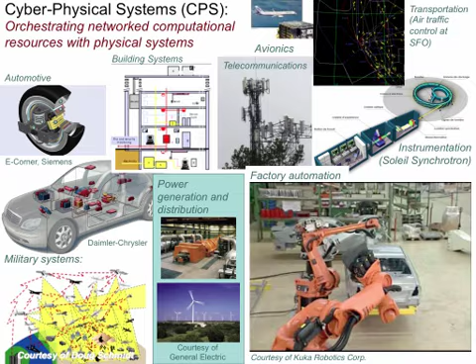Actually, it was Donatella's suggestion initially, I think, that I address this question about cyber-physical systems, and specifically the question whether this really is a new intellectual challenge. And I'd like to convince you today that it is, that it's a very interesting intellectual challenge, and that it does have some fundamental twists over many of the things that we've done before. So first, to make sure that we're on the same page, I want to make sure that everyone understands what I mean by cyber-physical systems.

The term itself was actually coined by Helen Gill at the National Science Foundation around 2006, and she helped pull together a community of interest from among academics that she saw as people who would be able to contribute in significant ways to the agenda, and then formed a new program in the National Science Foundation. And of course, many people were very suspicious, rightly so, of any new program. Is it just a rebranding of things that were there to begin with? What I'd like to do today is try to convince you that it is not just a rebranding, that it is actually a very interesting and very fundamental challenge.

So first of all, the field is about the orchestration of networked computational resources with physical systems. You could say this means it's about systems that include computers, so therefore it's embedded systems. But in embedded systems, people are really focused on the computing part. The interesting thing about cyber-physical systems is the conjunction of the computing part and the physical dynamics. That's where it becomes particularly pertinent, and where it really is a significant twist on what's been there before.

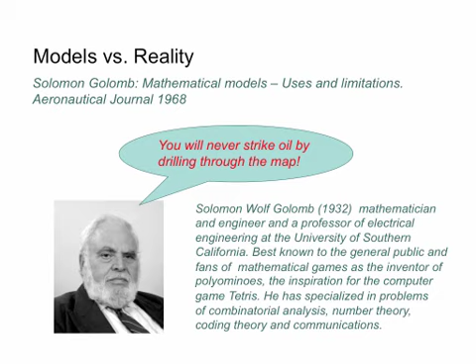And that, I think, is a very important observation. It says that you have to know very clearly in your head whether you are dealing with a model, i.e. a map, versus a geographic formation, which is the physical system. The distinction is very important, and I think engineers often get so close to their models that they lose sight of the distinction between the model and the physical system being modeled. While it's certainly true that you're not going to strike oil by drilling through the map, this does not in any way diminish the value of a map.

This should not be viewed as an indictment of models. The models are still exceedingly useful, but you have to understand where their utility stops, okay?

So I'd like to cite one other person, Hermann Kopetz, who actually taught me something over breakfast at a conference where I happened to run into him. And I've never actually found a very clear articulation of this concept in his papers, although it's there kind of indirectly. But he stated it extremely clearly at this breakfast, and it completely changed my way of thinking about a lot of the things that I was doing.

And what he said was that many of the predictive properties that we assert about systems, so these are things like determinism, timeliness, reliability, and safety, are actually not properties of systems. Systems don't have properties like determinism, okay? These are properties of the models of the systems, not of the systems themselves. The real strength of the models is that we can make definitive statements about the models, and from those definitive statements, we can infer properties of the system realizations.

So when we assert that a system is deterministic, that's actually not a legitimate statement about any physical system. No physical system is deterministic. How's it going to behave while it's being crushed? How's it going to behave when it's at the bottom of the sea? You don't know. It's not deterministic, but the model is.

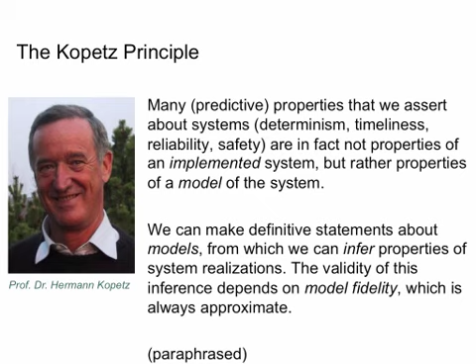Now, we have gotten enormous power from deterministic models. And I'm going to apologize right up front to those of you in the room who work on asynchronous logic and on probabilistic circuits that may or may not give you the right result. I sympathize with your challenge because you've got an enormous uphill battle to fight, which is to deliver the value that people in the circuits world have gotten out of deterministic models of circuits, okay?

So synchronous digital logic, that concept is a model. It's a model that is talking about rather messy behaviors of transistors and so on, but it's an extremely powerful model. And I would say that a huge part of the information technology revolution actually depends on this model. The fact that you can produce a microprocessor that will execute a particular chunk of code essentially perfectly reliably, over and over again, 1 billion times a second, and work correctly for years.

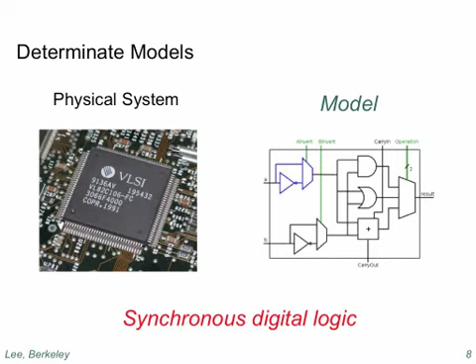The predictability and the determinism of that model is a very, very powerful thing, and it's not something that we should give up lightly. You could say, well, no physical system is deterministic, so we should give up determinism. And you're throwing out the baby with the bathwater. It's true, no physical system is deterministic, but you don't give up models that have this power easily and lightly.

Another example of a deterministic model that has had a huge impact in the development of our technology is single-threaded imperative programs. These are models of a process, of an algorithm. And they get executed, in fact, on the same hardware that is ultimately built on this synchronous digital logic, but it's quite a different model.

Anyone who has written multi-threaded programs knows the price that you pay when you lose this determinism, right? It hurts, believe me, it really hurts. It costs a lot to lose determinism in this case. And an awful lot of what we depend on in software is, in fact, the determinism that arises from being able to be assured of correct execution of a deterministic single-threaded imperative program.

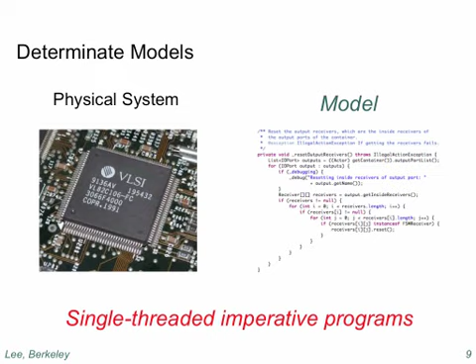What about the physical world? Well, in the physical world, we have also, for hundreds of years now, derived enormous benefit from deterministic models. You've got some physical system, this is a generator that will produce electric power. We have models that have been developed and refined over hundreds of years, differential equation models that are fundamentally deterministic.

I'm not saying that we don't have also non-deterministic models and even probabilistic models. Those are okay. What I'm emphasizing here is the power that we've gotten from the deterministic models, that they've given us an ability to design control systems, for example. I mean, you could say, all right, the feedback control system that keeps a helicopter in the air, how is that designed?

It's designed using deterministic differential equation models. Is the helicopter deterministic? No, of course not. But we wouldn't be able to design that control system if we didn't have that powerful engineering abstraction, okay? So we don't want to lose sight of the power of the engineering abstraction.

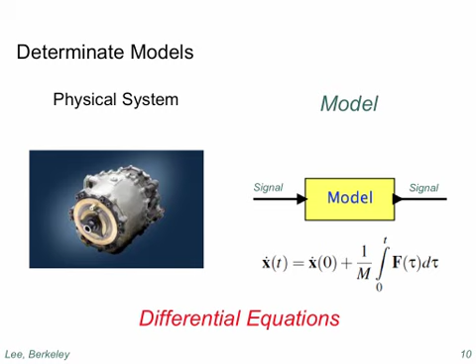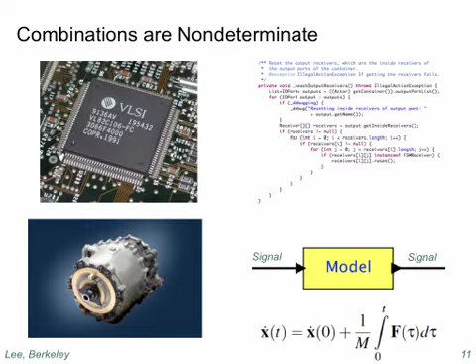Okay, so we've got powerful models for software. We've got powerful models for hardware. We've got powerful models for physical systems. What happens when we put them together? Today, they become non-deterministic across the board immediately. Non-deterministic, okay? We don't have deterministic models for the composition of that single-threaded imperative program and that generator. They're not there, okay?

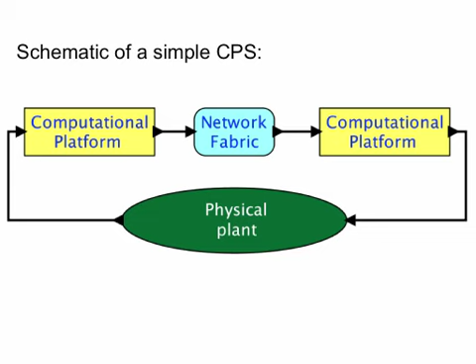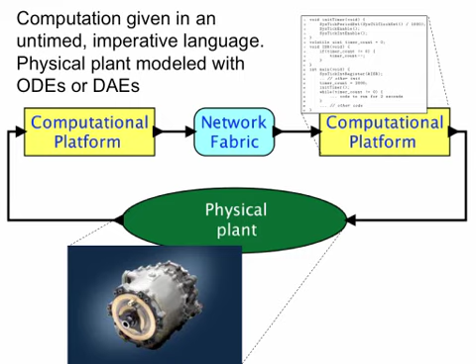So here's a simple schematic of a cyber-physical system. A cyber-physical system has a physical plant. It's got one or more computational platforms, microprocessors. It's got some network fabric, okay? And we have models for the pieces. We give the model of the computational platform as an imperative program. We give a model of a physical plant. However, when we put them together, these models actually don't work together in a deterministic way.

Why? Well, let's look at the software. So here's a very simple, very short sequence of actual C code that is meant to do something for 2 seconds and then stop doing it, okay? And so it seems to be actually expressing behavior that is going to affect the physical world in some predictable way because, of course, we're trying to take some action for a particular period of time in the physical world and then start doing something else, okay?

But here's my question. This program is a model, okay? Does it specify timing behavior? The answer is actually no. It doesn't say anything about timing behavior, right? It in fact says, okay, well, you've got a C procedure that must be called. Interestingly enough, it looks like from looking at this program, this procedure is never called. So actually, unless you tell the compiler not to do it, it could optimize away this procedure because it's never called. It's going to be called by an interrupt service routine.

How does that happen? Well, that happens because we invoke another C procedure that writes a binary pattern into a memory mapped register, which happens to tell the hardware that it should invoke an interrupt service routine, okay? And it writes into other memory mapped registers to control a timer. So where is the timing behavior in this model? Well, the timing behavior is actually not in the model. It's just simply not there.

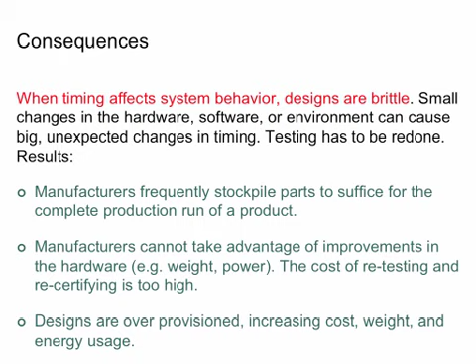Well, the model is not up to snuff, right? This model of single-threaded imperative programs is useful for describing algorithms. It's not useful for describing cyber-physical dynamics. It doesn't do that. It was never intended to do that. It was intended to describe algorithms.

And in fact, where you can see this is that the notion of a correct execution of a program in any widely used programming language today has nothing to do with how long it takes to do anything. That has no bearing on correctness. Programmers have to step outside of the programming abstractions in order to specify timing behavior.

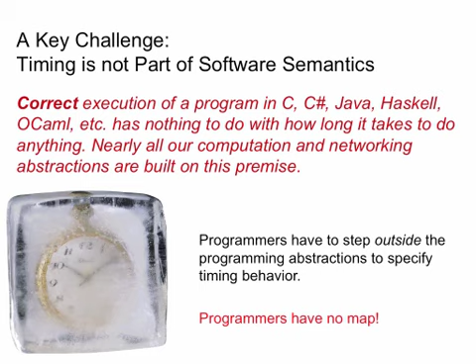In effect, programmers have no map. They're just tinkering with physical systems, going without a map. It's kind of like if you're going to drill for oil, don't use a map. Just start drilling wherever you happen to be. We know that's not going to be a very cost-effective solution, but this is what we do today when we design cyber-physical systems. Now, computer science hasn't completely ignored timing, of course.

In fact, I credit my colleagues David Patterson and John Hennessy with having revolutionized computer architecture by really emphasizing a sort of quantitative, timing-based qualification for computer architecture ideas, right? But today, timing for computers is a performance metric, not a correctness criterion.

Correctness is about the relationship between the physical system and the model. Performance is something else altogether. They're not the same concept. So let me emphasize what I mean by correctness. Here's a short segment of C code. In every correct execution of this code, line 8 will not execute. That's a fact. If line 8 executes, there is something wrong in the physical realization.

Now, could line 8 execute in a physical realization? Yes, of course. You could get an alpha particle that changes the state of your program counter, and the program starts executing line 8. That's always true of a physical realization. The physical realization isn't deterministic, but in the model, line 8 does not execute. People who work in formal verification depend on the strength of an assertion like that. It's a mathematical assertion about the model. That's what we mean by a correctness criterion.

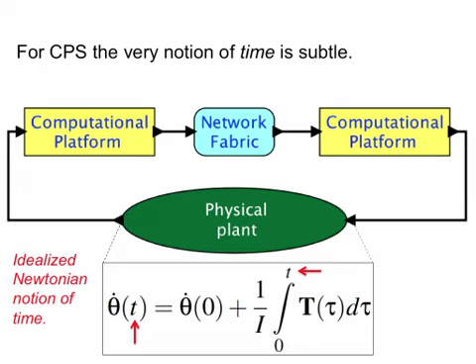So if your focus is on the physical plant, you might use a model like this. This is a very simple physical plant. Of course, real physical plants are more interesting. But it's got this little magic variable t. And people in engineering disciplines that are primarily focused on physical devices use that variable t quite liberally, as if there was some universally available fabric of time that you can just ask, what time is it? So this is what I call the idealized Newtonian notion of time.

In a cyber-physical system, you've also got these computational platforms. Do they have access to t? Well, no, they don't, actually. They can make measurements, but those measurements are going to be imperfect. And there's going to be discrepancies in their measurements. Any two platforms on a network are going to disagree on what the time of day is. No matter how much effort you put into time synchronization and clock distribution and so on, there's going to be discrepancies. So you need a model of time that is robust to those discrepancies.

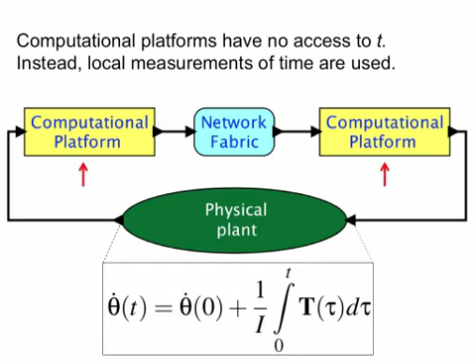So there are naive answers to these. The Newtonian idealized physical notion of time. In the software world, it's just a double, which is a really poor choice for a model of time. The hardware designers know this, but software designers don't seem to know this yet. They'll discover it. It has the property that the precision with which you measure time depends on the magnitude of time. That's probably not a good idea. It's very hard to have a clean notion of simultaneity when your semantic representation of time is a double. Very difficult to do.

So there's a lot of interesting questions here. Time synchronization, what role should that play? How about precision of time? How about representation of time? People have talked about superdense times, hyperdense times, multiform time, where you have timelines proceeding at different rates in different parts of the system. Very interesting problem, lots of good work to be done, some good work to be drawn upon as well. Challenge number 3: can we develop a model of time that is consistent with the realities of time measurement and time synchronization, and also with the engineering models that are used in physical systems? So in essence, we need a semantics of time.

Already, hopefully, I've convinced you that we're not talking about a lightweight problem area anymore. There's deep problems here, but there's more. The next set of problems that I'd like to address are really more cultural problems. They're problems that humans have getting their heads around complexity in systems. So I'm going to talk about the problem of model engineering.

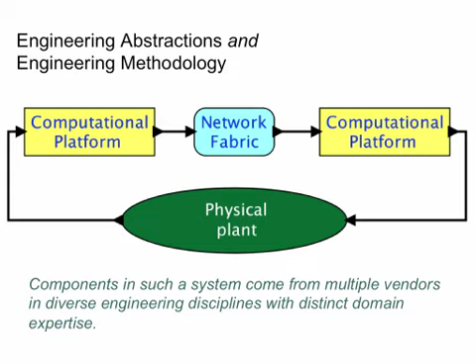Okay, so here's our canonical cyber-physical system, having this physical plant, a computational platform, and a network fabric. The problem here is that any interesting cyber-physical system is a multi-vendor system, multi-physics, with a variety of different models coming into play in different parts of the design. We have the blind men and the elephant problem, which is that any individual who looks at this system sees it through their own blinders and sees only the part of the system that they are immediately familiar with. So let me give a concrete example.

And some of them are very simple constraints. Don't connect an AC bus to a DC bus. Don't connect 2 DC generators together on the same bus. Don't leave any load unpowered for more than a certain amount of time. Things like that, okay? These are all constraints on the design.

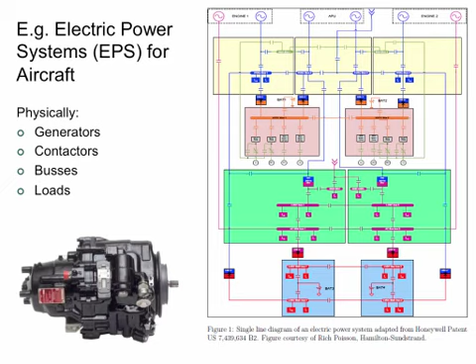But when you look at a system like this, let's take a much smaller version of it than what's in the patent. So this is just a single generator, a single contactor, a single bus, and a single load, okay? So there's kind of the plant. And it has a PID controller that's controlling the generator to keep the voltage and the frequency regulated.

It's got some protection logic that's making sure to protect the load, for example, against overvoltage conditions. It's got a supervisory controller that is regulating the contactor to determine whether the contactor should be open or closed. And it's got commands coming from the pilot to turn on or off the load, okay? Very simple subsystem, and it's already an elephant, okay, that a bunch of blind men are looking at, right?

If you happen to be an expert in electromechanical systems, you might be focused on the generator. If you're a mechanical engineer, you focus on the fact that the contactor has physical dynamics and it could bounce, for example. You have to worry about the bouncing on contactors, okay? If you're an electrical engineer, you might be focused on how the bus is handling the distribution of the electric power. If you're a control systems engineer, you're focused on the control system design. How do you do a PID controller to control this generator?

If you're a software person, you're probably focused on this supervisory controller. What is the logic of that? How do you prove correctness of the supervisory control? If you're a networking guy, notice these things are actually getting implemented on different microprocessors separated by a network, so it's a communication problem. If you're a human-computer interface person, this is the pilot control problem. You're worried about confusion, for example. If your overvoltage protection kicks in, will the pilot know it?

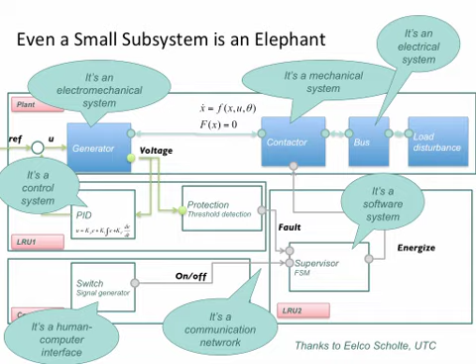There's a bunch of engineers here with different backgrounds looking at this problem in radically different ways. And this is a very small cyber-physical system problem, okay? So, number 4, how can we define interfaces between components that bridge engineering disciplines and clarify requirements and expectations?

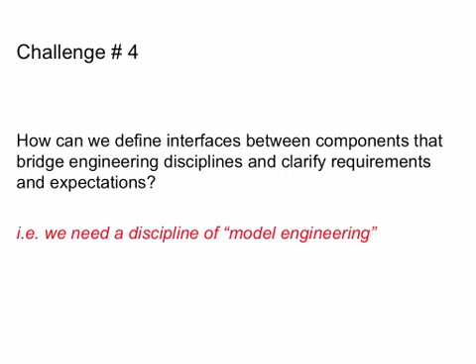In essence, what I'm calling for is we need a discipline of model engineering, okay? I call this model engineering sort of analogously to software engineering, but software engineering becomes a subset in a sense because you have to do software engineering as part of this. But really what you want to be doing is engineering complex models with well-defined interfaces between heterogeneous components. And one nice thing about this phrase, model engineering, is that if you master it, you can be a model engineer, which I sort of like the idea of being.

So, all right, I've raised some interesting challenges. How do we approach these challenges? Well, I'd like to spend my remaining time just telling you a few little vignettes about things that we're doing at Berkeley to try to address these problems, okay? Because I hopefully have convinced you that the problems are interesting and rich enough to warrant some effort, okay? What I'd like to next convince you of is that there's some very interesting things we can do and there's a lot more to be done.

So here's a list of some of the particular projects that we have going on right now, and each one of these would be another hour talk at least to go into any depth.

So what I'd like to do is just kind of a once-over that tries to tell you where I see the opportunities are in addressing these problems. So let me start with the PRET machines project. So PRET is an acronym that I really like because it has at least 5 different meanings, right?

It stands for precision timed processors. It stands for predictable, repeatable timing. It stands for performance with repeatable timing. That's an important one because you can get repeatable timing from microprocessors if you're willing to give up performance. It's very easy, okay? In fact, all you have to do is go find, maybe Boeing has some in liquid nitrogen. Go find some old Intel 8080s, and they will be PRET machines, in fact. They're perfectly controllable timing, okay?

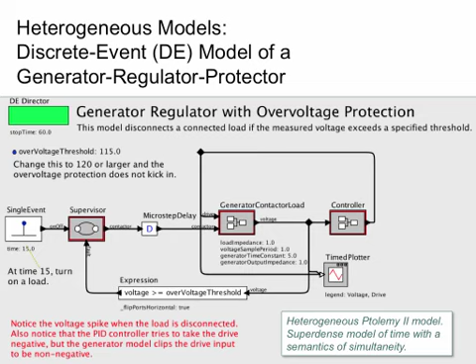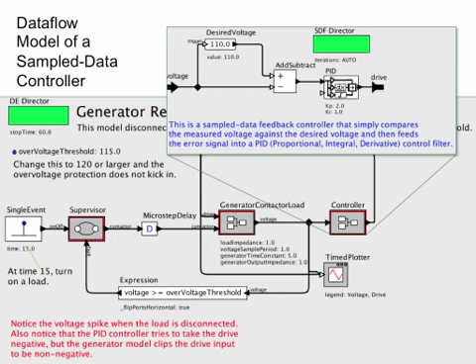But nonetheless, it is using a different modeling paradigm that nonetheless combines in a deterministic way with these others. The supervisory controller is itself a state machine, which is a completely different kind of model from the ODEs and from the discrete event model and from the data flow model, completely different, okay? It's just specifying the state transitions that occur and so on.

Okay, so this is our attempt to address this blind men and the elephant problem, which is to have well-defined interfaces between these distinct modeling regimes, where each of these modeling regimes is perhaps pertinent to maybe only a subset of the engineers who are working on a project, right? So the people who work on the ordinary differential equation models are not going to be the same people who are working on the supervisory controller necessarily. They're going to be working with different models. They're going to be working with different modeling paradigms.

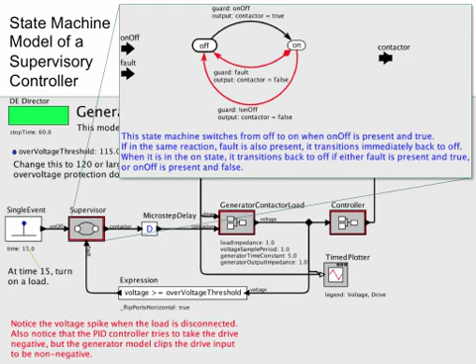The key is to get these modeling paradigms to work together. Now, there's always then the question of modeling tools. And I want to emphasize that it's a different problem to combine modeling tools than it is to combine modeling paradigms. Okay? Combining modeling tools is a much harder problem because there's a lot of accidental complexity in it.

There's just the problem of, oh, the tools are written in different languages, or the APIs aren't published, or the APIs aren't documented, and they change with versions of the tools, or the tools don't run on the same platform, or huge numbers of just accidental complexities. Tool integration is a nightmare of accidental complexities, okay? From my perspective, tool integration is not an interesting problem.

Integration of paradigms is the interesting problem. And if you solve that, the tool integration will follow because people will figure out how to define the interfaces between the tools. I'm personally particularly enthusiastic about an effort that is still a little bit raw and has some rough edges, but the FMI effort, which is being led by the Modelica community, to define an interoperability standard between at least a certain class of tools that can represent these kinds of systems.

And we've got some existence proofs that it's possible, for example, to take a model in Modelica, which is a very different style of model than the differential equations model. So this is a generator and load specified in OpenModelica. And the interesting thing, just to emphasize how different this is from a Simulink style model, the ports on this generator are not inputs and outputs, okay?

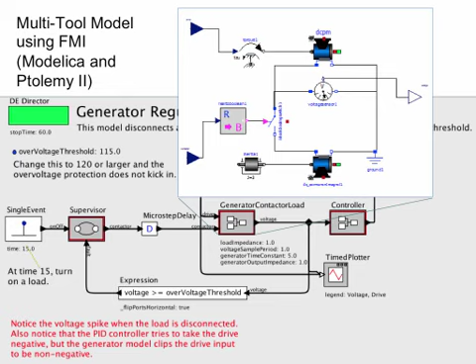You can embed that, however, using this FMI standard into other very different kinds of modeling paradigms, such as this discrete event modeling paradigm. So this is, I think, a promising direction and work that I'm quite enthusiastic about. Now, let me also talk about another issue. So far I've shown you this generator load as a very heterogeneous model, right? We've got software, we've got physical dynamics, we've got data flow, we've got control system design.

What about the hardware, okay, that we're going to implement this thing on? Suppose we're trying to decide, well, what kind of buses do we need? How many processors do we need? What's the interconnection mechanism going to be? What's the scheduling protocol going to be, right? One way to do it would be to take this same model and start to elaborate it.

Okay, the communications between these things are, in fact, discrete event communications. Therefore, I know how to construct discrete event models of networks. I could insert a model of a network here and have all my communications go through that network component. But this is going to create a problem for the engineers working on this because the control systems guy really doesn't care about the details of the network, right? He or she does care about the latencies that the network introduces, right? But not really about the routing protocols and how those latencies are achieved.

And the model is going to get muddied with details about the network if you just take this model and elaborate it. By the way, when people build models like these, okay, one of the things that I've been battling against is that they very quickly become proud of the complexity of their models. And I keep telling them, you should be embarrassed by the complexity of your models. Useful models are simple models, right? As soon as they become complex, they become less useful.

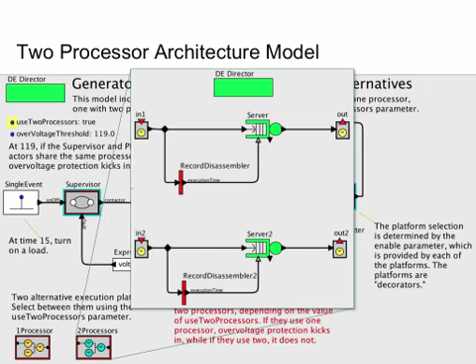I can simply substitute in a single processor model, which simply takes the requests that are coming in on these same two request lines and combines them into a single queue and server. And I'm going to get different behavior from the system as a consequence of that choice of the other model, right? The key thing here is to separate these models.

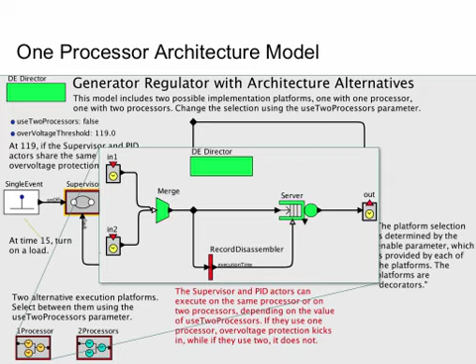So this particular effort we call Metronomy because probably many of you would recognize this approach as having been pioneered by my colleague Alberto Sangiovanni-Vincentelli, who in the Metropolis project really introduced this idea of weaving together platform models with models of the functionality. So Metronomy is our combination of Metropolis and Ptolemy that is pulling together these ideas within a framework that provides for these separate but conjoined modeling techniques.

Okay, so the four big challenges that I've identified are coming up with determinate cyber-physical systems models. And I'm certainly very interested in arguing with people about the value of determinism, but I'm afraid that history is on my side on that. We have gotten tremendous power from deterministic models. And so the fact that we have no such models for cyber-physical systems, in my view, is just an enormous gap. We need to have open minds about languages and tools.

Interestingly, in my experience, I interact a lot with software people and with hardware people, and I find that hardware people are way more open-minded than software people. I don't know why this is, but it is.

We need a semantics of time. Time is not a simple concept in practice in systems, and we need a semantics so that we can talk about models of time that have rigorous properties. And we need a discipline of model engineering to pull these things together.